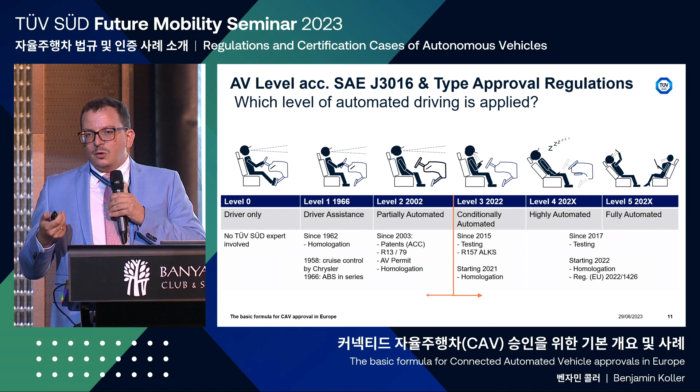We are now between level 2 and level 3. The first systems, called level 2 plus, are already in the market. There are some test vehicles already operating in Europe regarding level 3 and level 4, but what we're missing now are the first applications for level 4 systems. ALKS is the first level 3 system available and type approvable from UN ECE, so we have the possibility to bring such a system into all contracting parties which accept UN R157. The system in its first stage was limited to a maximum speed of 60 kph, only taking over the longitudinal and lateral movements in one lane.

There are a couple of requirements to be fulfilled by the manufacturer - for example, functional requirements for the systems and required state transitions. You have to ensure the system is able to be operated within 10 seconds after a transition demand, in the event of an incident, so the system has to be able to operate safely for those 10 seconds.

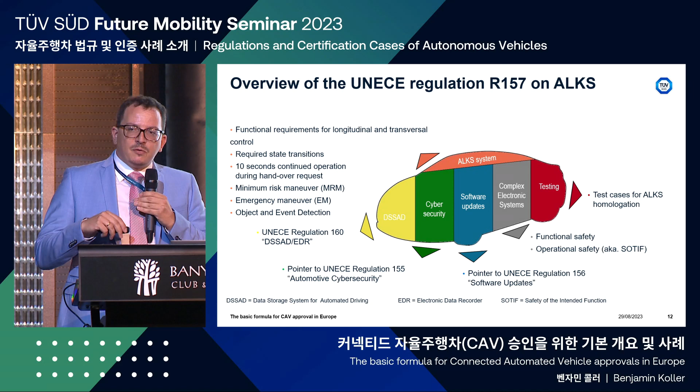There are also some requirements in the regulations to be compliant regarding the data storage system for automated driving - this records who was responsible for the driving task. And the EDR, the electronic data recorder, is similar to the black box of an airplane. It records everything within a specific time frame - what happens, what the reason was, and what the status of the system was. Then you also have to be compliant with 155 and 156 for cybersecurity and software updates.

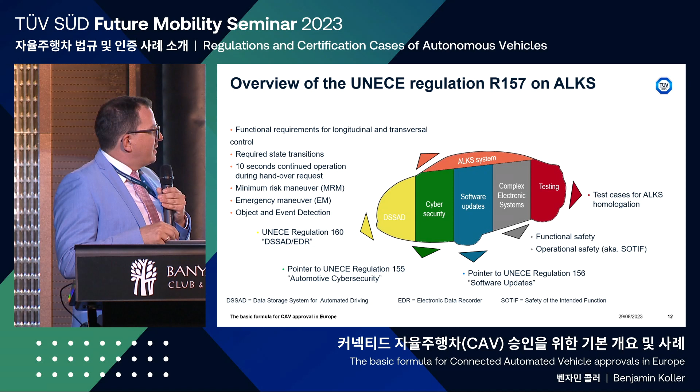Then there are some major points which are also assessed during the approval process - we have the complex electronic systems. Here you'll find requirements regarding functional safety and operational safety, the possibility to use simulation as a test method during the type approval process, but also in special additional annexes you'll find the test cases for ALKS homologation. There are some mandatory scenarios, but there are also requirements to perform real-world testing.

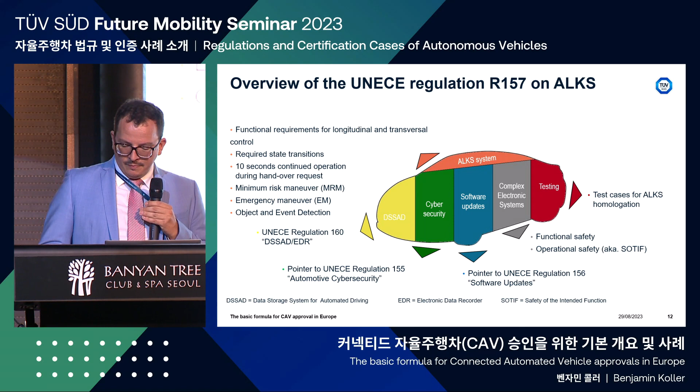For us, publishing 157 was the first point where we thought it would be possible to turn this off, to have the first automated vehicles on public roads.

But as we see, there are only, from my side, two known systems approved by manufacturers - one is Daimler, the other I think was Honda in Japan, having these systems available for the end consumer. And there's the question - why haven't we seen these systems more often in vehicles? The first point is the business case and the effort required for type approval.

But the new amendment of ALKS, published this year, changes many things regarding the performance of the system. It's now allowed up to a maximum speed of 130 kph. There's also the possibility for M1 and N1 - passenger cars and light commercial vehicles - to operate a lane change. And of course, you can now also use ALKS in heavy vehicles, the M and N classes, but there's a limitation that these vehicle classes are not allowed to perform lane changes.

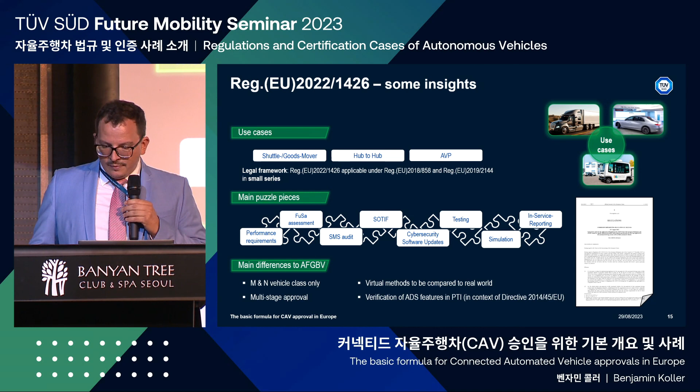Regarding the approval process, normally in Germany you have three steps. You have to do the vehicle type approval, for example by the approval authorities, the KBA. The next step, which is the most challenging point for customers and manufacturers in Europe, is how to bring such vehicles on the road so you're able to operate the systems. This will be step 2. In Germany, you need an approval of the operating area.

In Sweden, in comparison, the Swedish government will say the places and areas where you're allowed to operate such systems. Or take Spain, for example - Spain always says okay, you can operate automated and autonomous vehicles, but it's not allowed to activate the systems, for example, in tunnels. Regarding the federalism in Europe, there are some difficulties for manufacturers to get an overview of what has to be considered and what are the limitations and boundaries to operate such a system. The last step, of course, would be to go to the local authorities to register the cars.

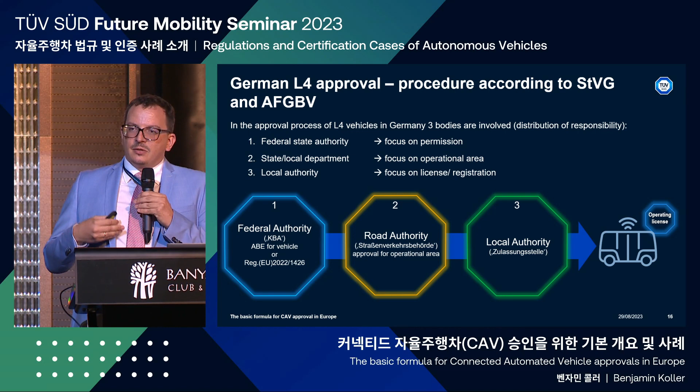Now I want to go shortly through the type approval process to give a first short overview of how it looks. The main difference is that in Europe we are in the type approval system, and not like in the US in the self-certification market. So here we are testing more before bringing such vehicles on public roads, and you have a third party in place, whereas by self-certification it applies to the manufacturer to bring the proofs and documentations. The main difference is in the effort and in the time - it seems mostly that the effort will be much greater with type approval before starting sales.

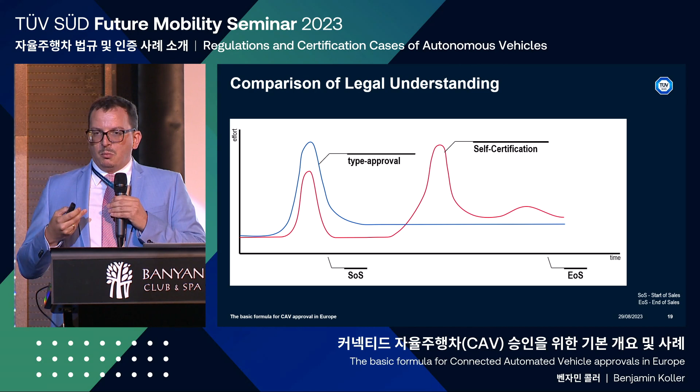But for self-certification, it could happen that the effort will increase later on when there are some later tests, for example, market surveillance inspections.

So how does the process look like? I have taken the example of Germany. In the first step, it's necessary to clarify the legal base for the approval, so you have to use, for example, for M vehicles, the European regulation 2018-858, which defines all steps and systems to be considered for the whole vehicle type approval.

Afterwards, when going more in depth regarding the system or the system approval, they will look what is the specific regulation to be considered and tested, for example. Afterwards, there will be the preparation of the approval documents and the review of such documents.

Based on the test report and the delivered information by the manufacturer, the approval authority, for example the KBA in Germany, the RDW in Netherlands, or the VCA in UK, will decide on the approval. When all requirements are fulfilled and the tests are done, the approval authority will grant the operating license and the type approval. The last step would then, by the owner, be the registration.

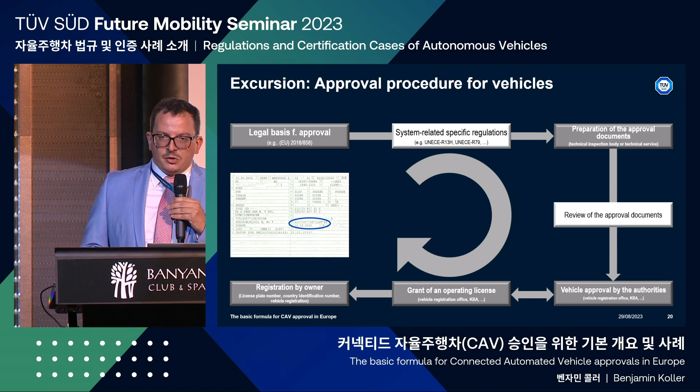So what is the relation between the legislation, regulation, and standardization? UNECE, for example, defines the requirements, the tests, and the procedure, for example with 155, 156, or 157 for ALKS. Afterwards, the European Union, as a contracting party of the UNECE, has to adopt the rules and directives for the European type approval.

And then the national countries like Germany, Netherlands, France have to implement the regulation into the national ones. Then there will be the third party for the type approval process, the delegation to the type approval to perform and execute the process. The standards give the manufacturers the possibility to create the evidence and proofs according to internationally accepted requirements and frameworks. Here we see the steps for the type approval and how the stakeholders and roles work.

First, the manufacturer submits the application. In the second step, the approval authority performs the initial assessment, so when you're not already listed as a manufacturer, this would be step two. Step three will be that the manufacturer chooses his technical service, with whom he will then do the type approval.

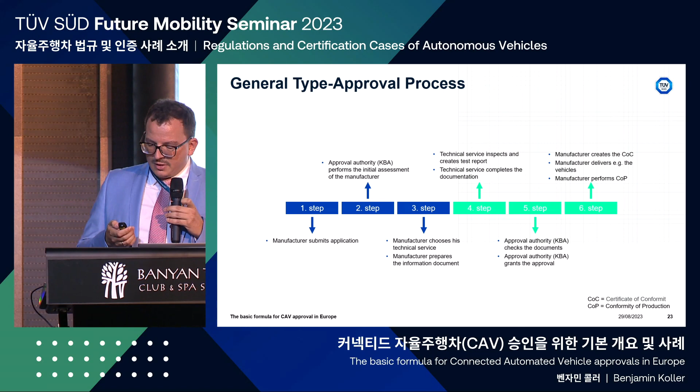In the last step, the manufacturer creates a COC paper and will perform the conformity of production tests and so on. So the regulation 858 also defines the roles.

On one side, we have Article 3, which defines who is responsible for the approval of the systems. We have the approval authority, which is responsible for all matters of the type approval, the withdrawal of approvals, and as a contact to the other European countries, for example for ALKS, it's necessary to have these discussions and exchanges for the operational design domain and the operational area.

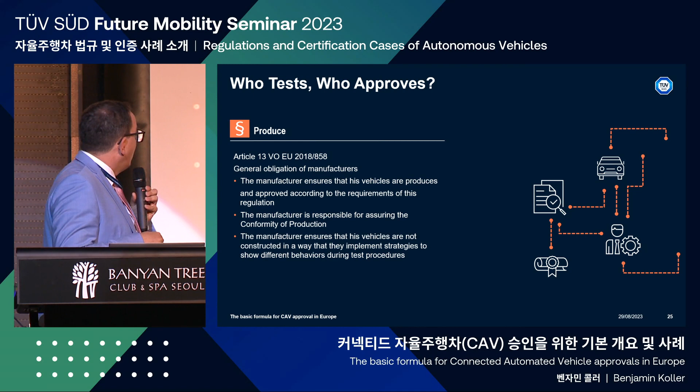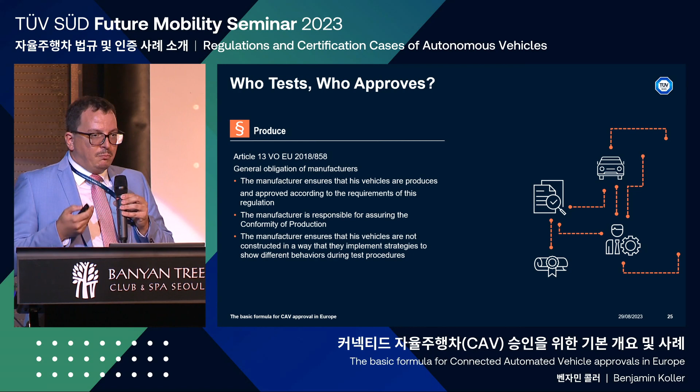Next, in Article 13, you will find all definitions for the manufacturer, meaning what his obligations are. He has to ensure that all requirements of regulations are fulfilled. He's responsible to perform and monitor the conformity of production, and he has to ensure, for example by emission, that there are no defeat devices in place.

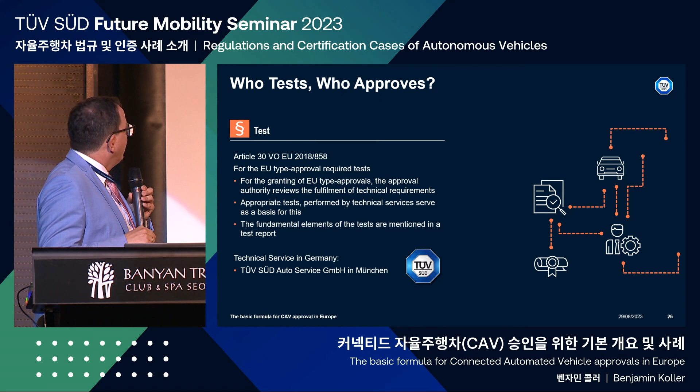In Article 30 of the directive, you will find the definitions for the European type approval and the tests that have to be performed. On one side you have the European type approvals, the authority reviews, and normally that's the task which has to be performed by the technical service.

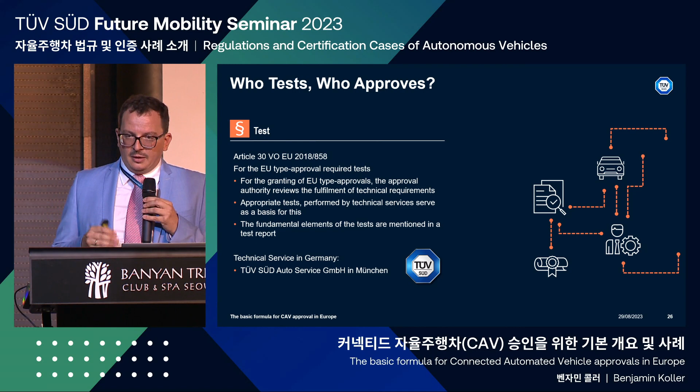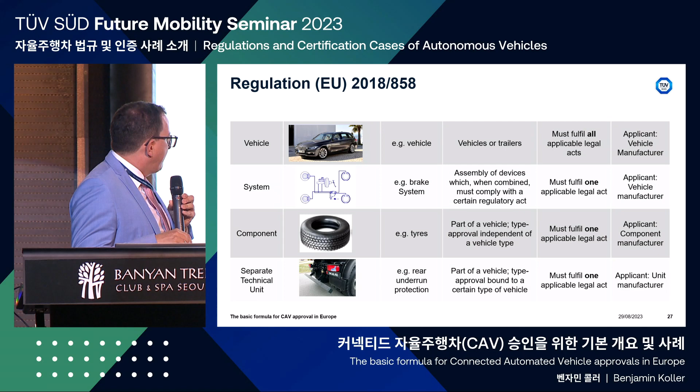So what kind of approvals are there in place regarding 858? On the main part, there's the whole vehicle type approval. Then there's the possibility to approve also systems, like braking systems, steering systems, or for example the automated lane keeping system. Then, of course, the components, or one exotic one is a separate technical unit, for example here with the underrun protection or the windshield.

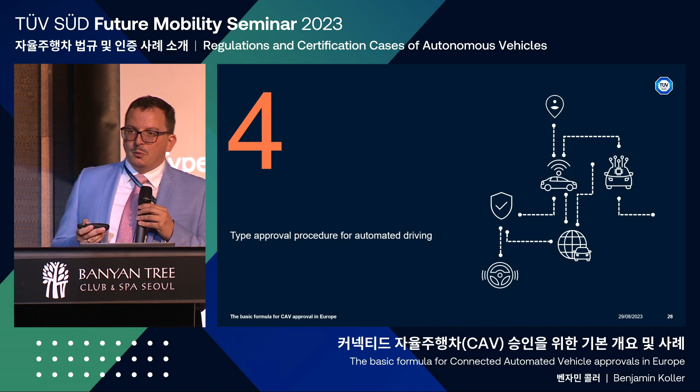But now going more in depth in the automated driving type approval process. Normally, with the AD system, you're defining the operational design domain. By defining the ODD, you will come to the point where it sets your requirements to be fulfilled and what kind of scenarios have to be tested.

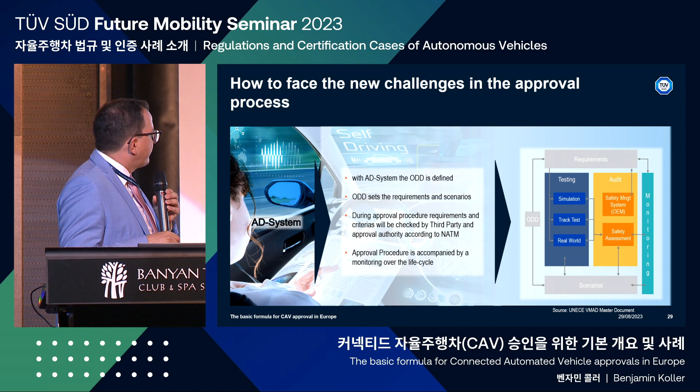With the ODD, you see the boundaries, so the requirements and the scenarios. Then during the approval process, a third party or the approval authority will check them regarding 2 pillars. It's very similar to the new assessment test methods worked out and defined by UNECE since 2018. So there are 2 main pillars.

You have a testing part and an audit part. In the audit part, there will be performed a safety management system audit, which will have to be done on the first stage by the manufacturer. Then there will be a second audit, which will be done by a technical service.

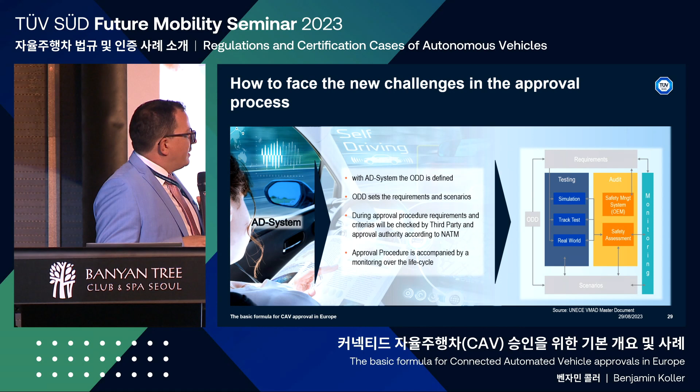Then we have the safety assessment. So for the complex electronic systems, where we look at functional safety topics, SOTIF topics, cybersecurity, software update processes, but also regarding, for example, your function description.

And then we will go through the testing parts. Simulation is allowed to be used by the AD system in ALKS, but also in level 4, as a test method for your testing or for your safety concept.

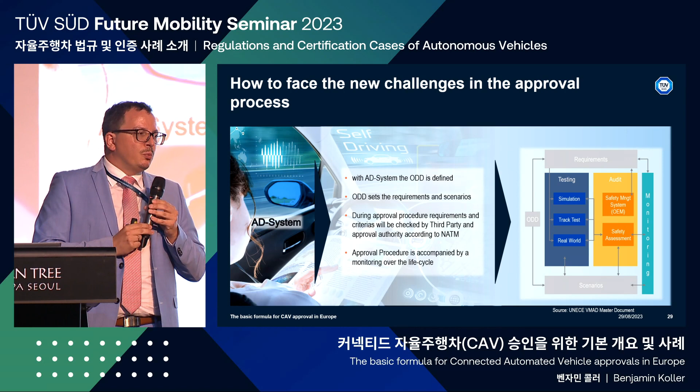On the other side, there are some mandatory tests defined on track tests or proving grounds. And then one additional point is that it's necessary to perform with such vehicle systems like level 3 and level 4 real-world testing.

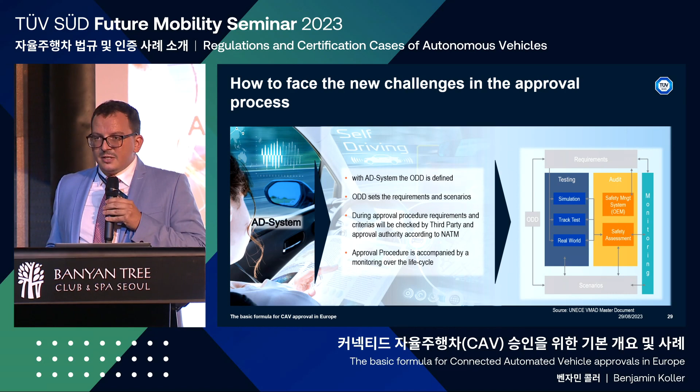So it's necessary for the manufacturer to be ready in the 5 disciplines regarding here. For example, using ALKS, Annex 4 of the ALKS regulation will define and describe the requirements and tests or assessments to be done regarding the vehicle and operational safety, but also regarding functional safety and SOTIF.

In the core text, you will find, for example in ALKS, the requirements that you have to conform with regarding cybersecurity, but also when you're using software updates. And by using virtual methods, you have to show the technical service the validity of your used simulation tools, but also the used models.

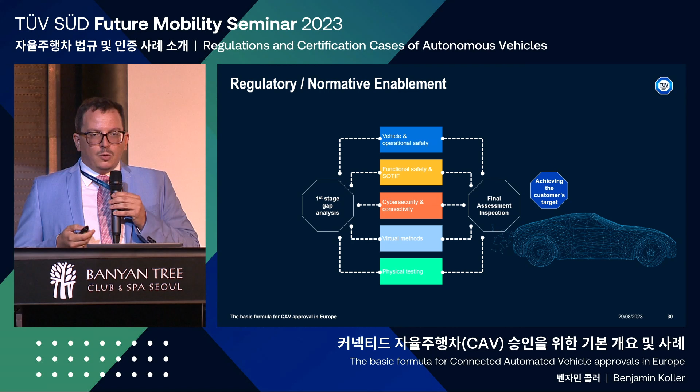And then Annex 5 and Annex 6 of the current version of UNECE 157 for automated lane keeping describes all requirements regarding proving ground testing and real-world testing.

So here on this slide, I draft a bit the main pillars for the type approval, as we already heard on the last slide. Here is the main, or the fundament, will be the audit and assessment part. The simulation is one puzzle piece.

Here we will perform an audit on the development processes and the V&V strategy, but also regarding an assessment of the safety concept. Here is the important point: it's not only functional safety, so it's functional safety, operational safety, SOTIF, and additional topics.

Then when you use simulation tests, we will consider the test results when we have trustworthiness regarding the simulation. And then, of course, there will be some measuring process.

Afterwards, we will have some proving ground tests. This will be the validation of the audit assessment results and also the performed mandatory scenario tests, for example described in Annex 5 of the regulation. And here the main point is that the reproducibility is given.

And then afterwards, there will be the real world testing, which gives the possibility to validate and verify the behavior and the safety concept from the safety assessment.

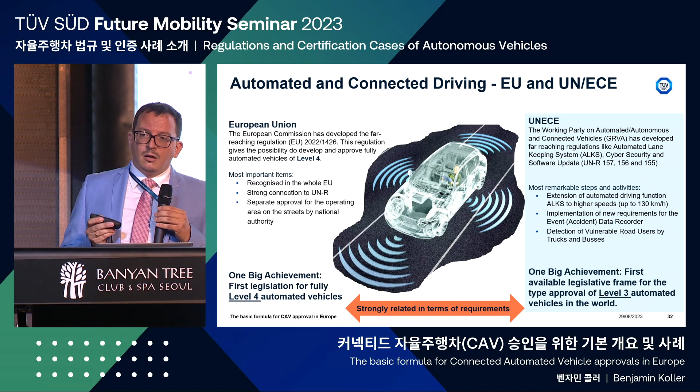Now we want to go through the single, or the main pieces, of the type approval of an AD system. So here you see the ALKS I used. We will now focus on the next slides on the complex electronic system, so regarding functional safety and operational safety. In the core text, you will find the requirements regarding the ALKS.

Just to show some examples, like the human-machine interface. There are requirements regarding how to activate the system, how to show the availability of the system, or, for example, when you are overriding the AD system.

Then there will also be some requirements so that a manufacturer has to ensure that there's no possibility of misuse of the system and to be conformed with the traffic rules. So for that, we will go then in the type approval process through a document check, so a document review.

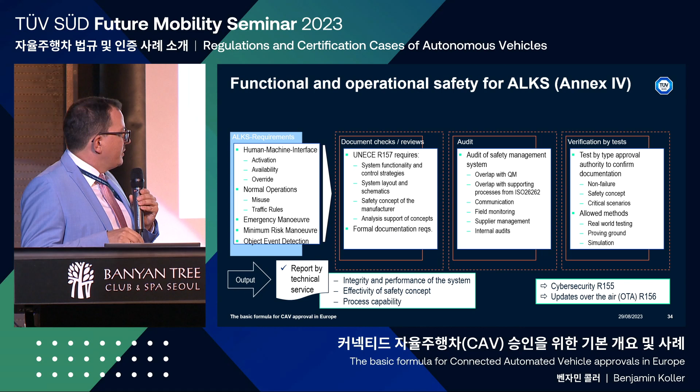By the next part will be the safety management system audit, and additionally the verification tests for the complex electronic system part. Output will be a report by the technical service for Annex 4, for example, but also in addition to the whole 157 approval. And then, of course, there will be the necessity to show conformity to 155 and 156 for cybersecurity and over-the-air updates.

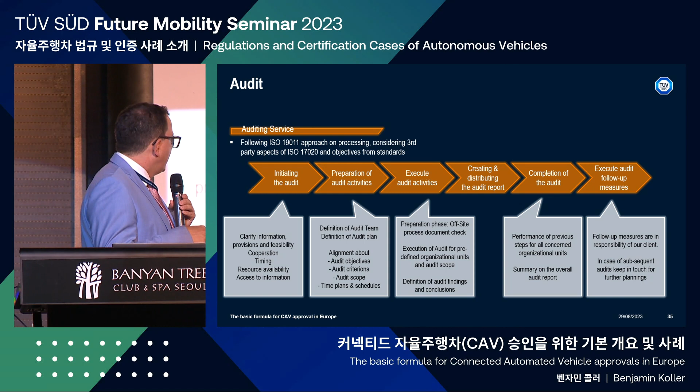So going to the audit, normally how does the process look like? Normally, initiating the audit means clarifying with the customer the requirements, the cooperations, the timing, the accessibility of the information. Then there will also be the preparation phase where we define the audit team on the technical service side, but also on the customer side, who will be audited and what will be the audit plan. This will then be concluded by an alignment.

Then the execution of the audit, it will mostly be a time duration of 3 days that we need. Here we have a preparation phase where we review the delivered documents. Then there will be the execution on site at the manufacturer, and then there will be the conclusion regarding the findings, or hopefully no findings.

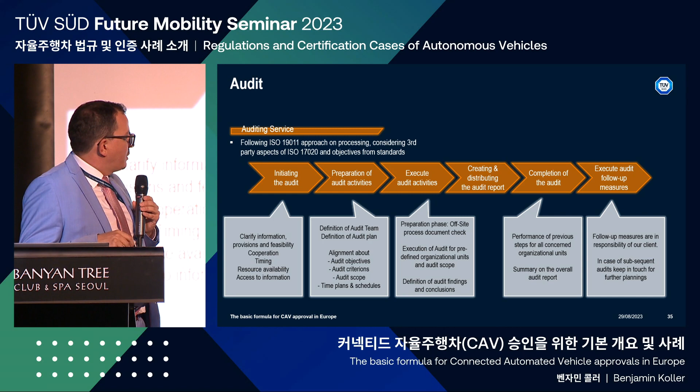The closing and completion will be a closing meeting, the summary in an audit report, and then, if necessary, some follow-up measures, and in case of subsequent audits, keeping in touch for further planning.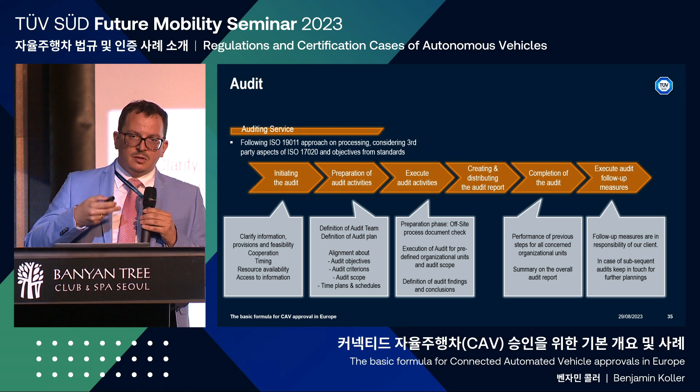Normally, during the surveillance, there will be the main audit regarding the safety management system in the first year, and each year after that, so the second and third year, will be the first surveillance. It will be a document review, and afterwards there will again be a main audit.

So document review, the safety assessment - here the process looks like this: we have the scope definition, for example for ALKS. Then the checklist will be prepared. We will request some information from the manufacturer. After the handover of this information, we will go through the checklist, draft a report, then discuss it with the manufacturer or, for example, with the applicant. Afterwards, after clarifying the findings or the result of the assessment, we will write the final report.

So the main effort lies with the document-based assessment of the safety concept, from our experience. The next main topic in the complex electronic system annex, Annex 4 for example, will be simulation.

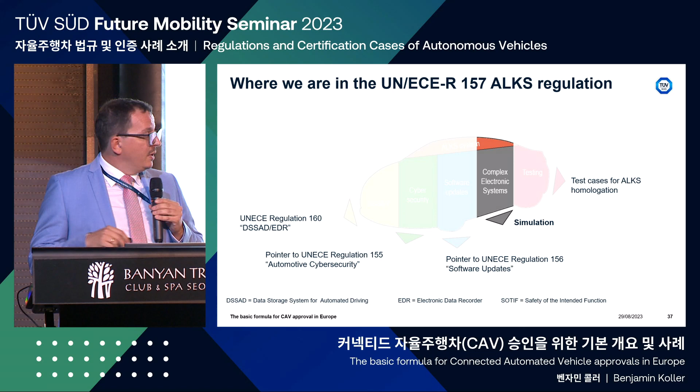One difficulty for the applicant is, for example, that he has to show that his system is similar to a human driver or better than a human driver.

When you look at some figures from 2019, for example in the US, traffic fatalities decreased by 2% compared to 2018. For example, in Europe, we have an estimated 23,000 road traffic fatalities, which is almost 7,000 fewer fatalities compared with 2010, and compared to 2018 it decreased also by 2%. And for example, in Germany, we had in 2019, 3,000 people died in road traffic accidents, which means it is the lowest level for more than 60 years in Germany.

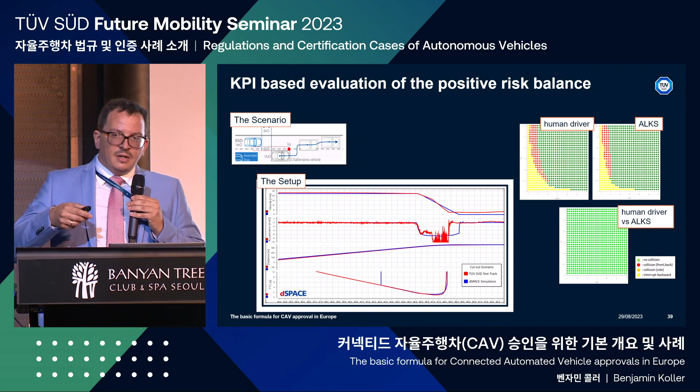Normally looking at the simulation, it's a KPI-based evaluation of the positive risk balance. First, for example, you have the scenarios - here a cut-out scenario. You have to show in a setup that your simulation is quite similar to the red line, the test track. Then you can go through all parameters and situations.

And then you have the possibility, by simulation, to show that, for example, your ALKS system is in all points better than a human driver. So these are the results of a human driver for the same scenarios, and you have this for the ALKS system, and in comparison it has to be shown that the ALKS system is similar to or better than the human driver.

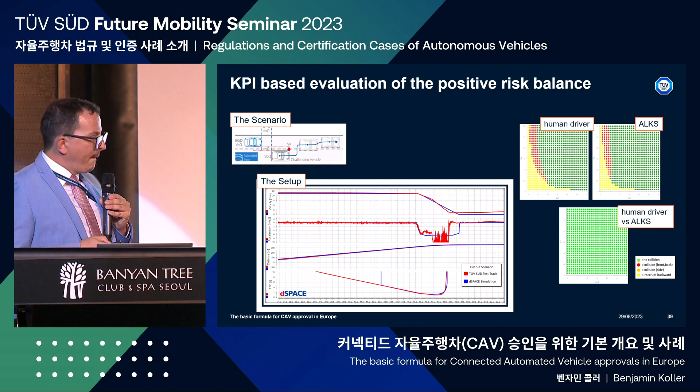The traffic situations are a huge number to be considered, and how could you certify the safety of the systems? The solution could be to use scalable testing with scenario-based approaches, but using only physical testing will increase your amount of effort. For that, you have virtual driving tests as a complement to the test track and real-world testing.

So the legal aspect is that virtual validation gets mandatory or usable in the regulations. You have to be compliant with your tools regarding the regulation and the agreement of 1958, the Schedule 8. Then you have the special provisions from the approval authorities, but also, for example, regarding the ALKS regulation.

So here's a virtual method, and there's a regulation gap, a challenge by using simulation. On one side you have the safety concept. ALKS defines in Annex 4 that you can use simulation as a test mode. You have to be in line with Schedule 8 of the revision, and you have to demonstrate to the approval authority or technical service that your tool and your used models are valid. This means you have to show simulation tool qualification or model validation.

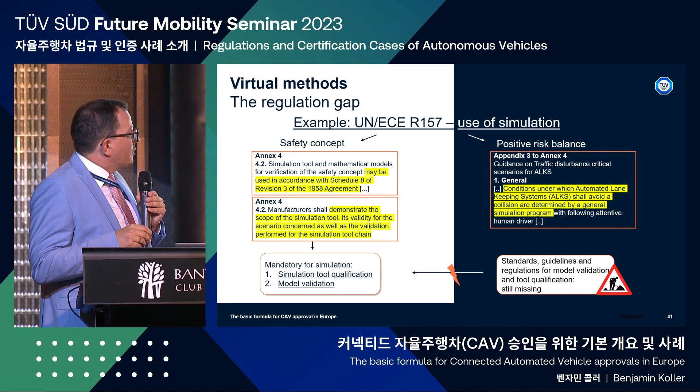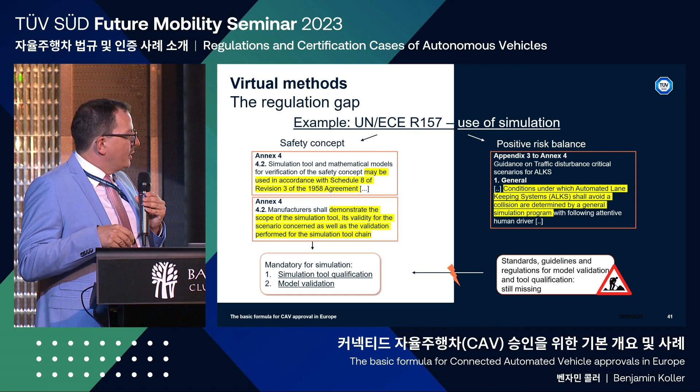By using the positive risk balance, you find, for example, in Appendix 3 to Annex 4 of the ALKS regulation, that the conditions under which automated lane keeping systems shall avoid a collision are determined by a general simulation program. So the challenge is that there are no standards or guidelines in place for model validation and tool qualification yet. This is one challenge to be covered in the next time.

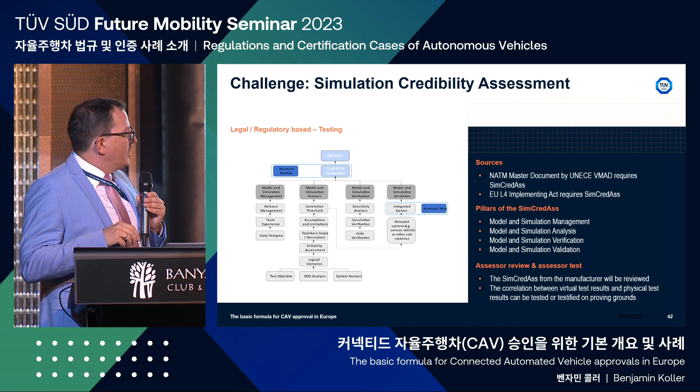One way would be the simulation credibility assessment, which has to be performed by the manufacturer and then reviewed by a technical service. The correlation between physical testing and simulation will also be reviewed and inspected by technical service. So what is included in the simulation credibility assessment? You have to show and assess the model and simulation management, and go through your analysis, verification and validation.

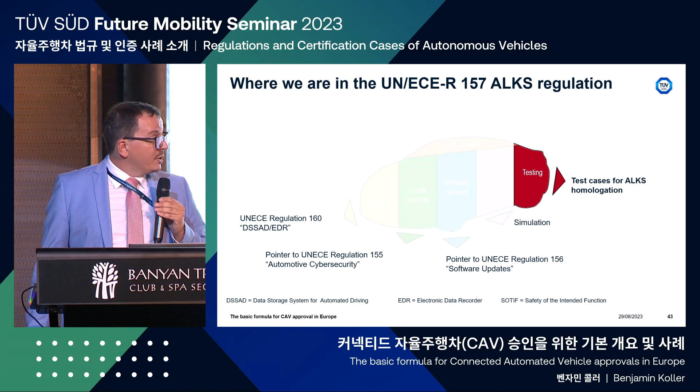Jumping to the next topic, it's the testing. Annex 5 and Annex 6 describe ALKS proving ground and real-world testing. So what is the main difference between the two? You can test criticality tests under controlled conditions on proving grounds, but not in the real world.

Is it possible to have deterministic test results on real-world testing? Not really, or very difficult, because you have to safeguard that it's always the same situation under real conditions, and on proving grounds it's not a problem to have such test results. The multidimensional real conditions you will not be able to bring onto that proving ground. So this is the advantage of real-world testing.

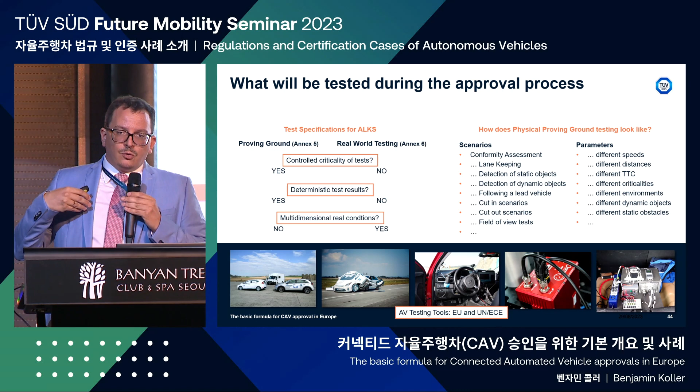So here I brought some equipment pictures from colleagues showing how to test such AD vehicles on proving grounds and what's necessary. Here you see also what has to be tested, for example, on the proving grounds - some checklist tests and conformity assessments. Other ones are the described scenarios in Annex 5, but also additional ones coming out from Annex 4, for example from the safety assessment.

So jumping now from ALKS level 3 system to a level 4 system, how does the process or procedure look like, using the example of the European regulation for level 4? For that, you need a designated technical service for the scope of level 4. Taking Germany as an example, there are only 3 technical services in place, and TÜV Süd was one of the first getting this designation.

So what does the process look like? In the first time we have, of course, the application, then the initial assessment or initial inspection as a manufacturer. There were first discussions on whether the requirements to be fulfilled by a manufacturer are different from the conventional initial assessment, but this discussion has ended so that there are no changes - they will include the additional requirements for manufacturers in the safety management system audit.

Afterwards, there will be the check and the test: document reviews, the audit of the safety management system, then the safety assessment reviews, the conformity check regarding cybersecurity and software updates when using software updates, and then of course the mandatory tests or spot checks regarding physical testing.

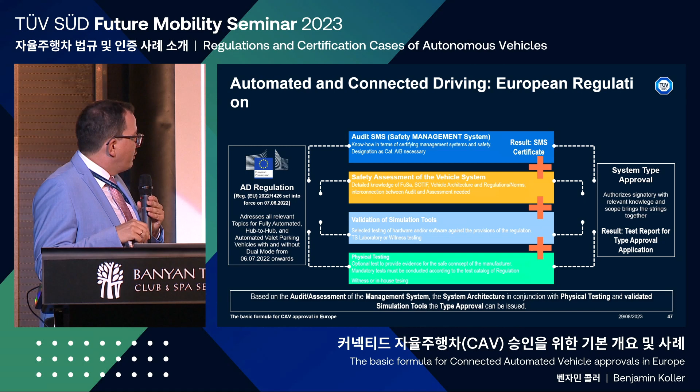And in the last steps, there will be physical testing performed by technical service and approval authorities on the proving ground, but also on public roads.

So one of the main questions from our customers is: is my ADAS AD function safe? Is it safe in all possible situations in an ODD? Did I consider all traffic rules, traffic signs, possible infrastructure, and the weather conditions?

So this is what has to be done by the manufacturer or applicant: he has to analyze his ODD. In the first step, it will be easy for him to split it into known safe areas and known unsafe areas.

But it is sure that there will also be areas that are unknown safe areas and unknown unsafe areas. So how do you bring this number of unknowns more and more to a lower number?

For that, you have to think about your scenarios, multiply it with a distribution of possible scenario parameters. Then you can decrease the number, but it will not be enough. After that, you have to calculate how to determine the residual risk in the unknown areas.

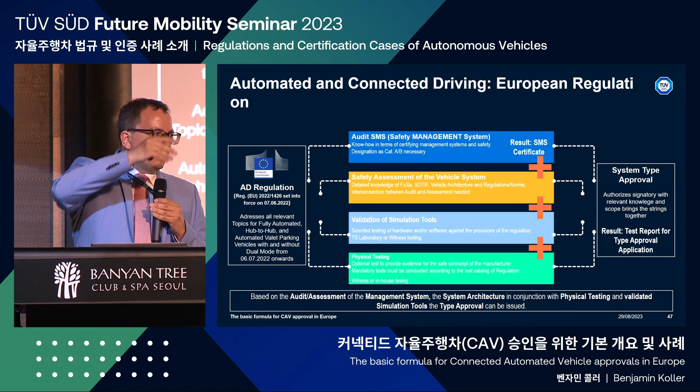You can also compare it to a dinosaur, from the head to the tail. In the first steps, it's easier to decrease the number, and then it becomes more and more difficult to find the unknown areas in your ODD.

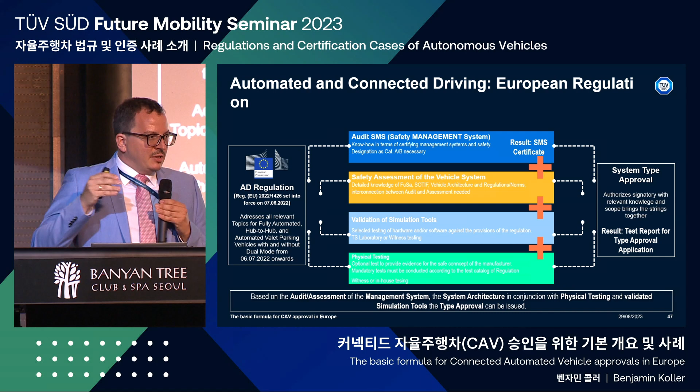One additional point I mentioned earlier is the advantage of European type approval: it's a multi-stage approval process. Here you have the possibility to use a base vehicle, so you can use an already type-approved vehicle.

Then you take this type approval and add a second stage, applying for the second stage with the ADS functionality or AD system. The advantage is that you only have to retest, for example, systems which are affected by the AD system.

And as a second stage manufacturer, you need the connection and the cooperation agreements between both manufacturers.

The challenge here, for example regarding cybersecurity, is the necessity that the first stage vehicle manufacturer has a cybersecurity management system regarding design and production. Now when there's a second stage manufacturer, a joint project has to be performed to rebadge the cybersecurity management system certificate, to consider and cover every possible threat in the management system.

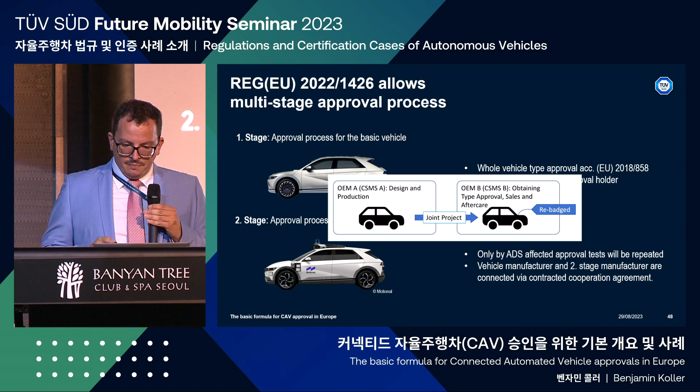So on this slide, I just put the main points of what has to be retested and what could be retested. For example, in green, you can just transfer the system approvals to the second stage.

So the challenge here is more for the second stage manufacturer in defining this collaboration and contract agreement with the first one, to have the guarantee to get all needed information, for example the boundaries and specifications of the vehicle. The main challenge is regarding roles and responsibilities: what has to be handled by the first stage manufacturer and what has to be performed and done by the second one.

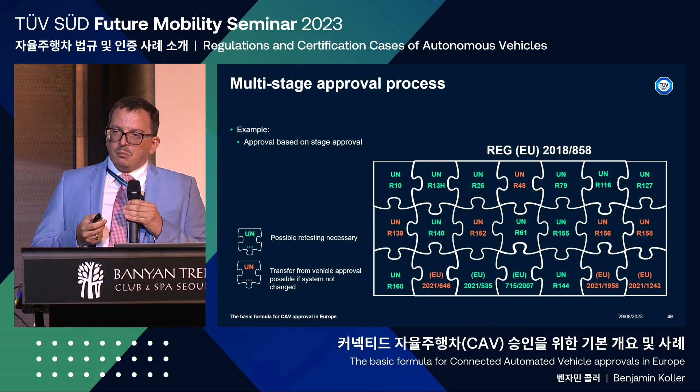Coming to the last chapter of my presentation today is the operating area approval. This is one special thing, for example, for Germany. As I already said, in Sweden or in Spain, it's differently defined and there are different laws.

So what will be the process? The main change is that the stakeholders are different. For the approval of the operating area in Germany, it's not the manufacturer who is responsible, it's more the vehicle owner, who will then operate the vehicles on public roads later on. The approval authority will not be the KBA, for example, who's responsible for the vehicle type approval. Here it's the responsible state authority for where the ODD or the specific operating area is located.

For example, in Germany, you have the highways - this is a federal authority dealing with this topic or responsible for the infrastructure. And then, of course, you have the different 16 states in Germany you have to handle and go through the approval processes. So what will be done?

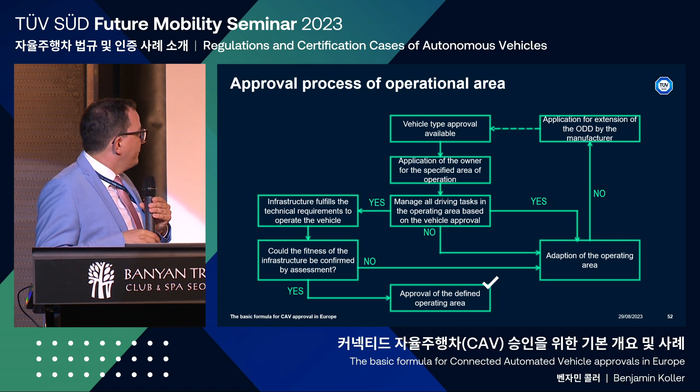So looking on the time and my slides, I think I'm at the end of my presentation. Many thanks for listening, and I hope I could give some introduction regarding AD type approval in Europe, and especially some insights and some challenges. If there are any questions, please feel free, or afterwards in the break session.